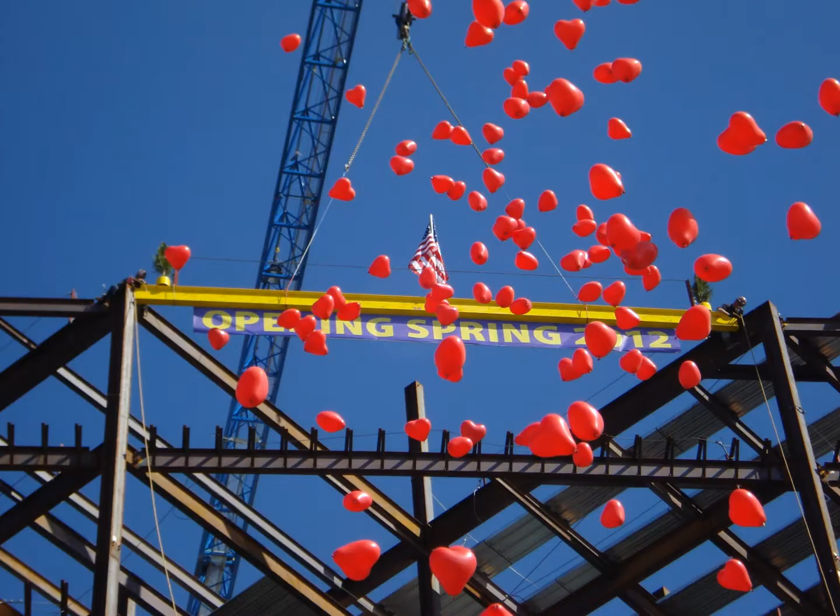During your safety orientation, you will hear and receive a lot of general information about work rules and the safe work practices required while working on this project. Please be advised that there is a required quiz at the end of this orientation. This information is vital to your health and safety and to the health and safety of those around you.

Our culture is based on the philosophy that all injuries are preventable and that performing work safely at every project, every day, is key to our long-term success as an organization.

We have a simple goal. We want you to go home every day feeling as fit and as healthy as you did when you came to work, free from injury and illness. Your loved ones are counting on this too, and we don't want to disappoint them, ever.

Our vision for safety excellence: to provide a safe and healthy work environment for all who are touched by our business, and a culture of safety commitment to each other.

A personal look at safety. Which one are you? If you ask 100 people what safety is, you will likely get at least that many answers. The goal for us is to bring everyone to the point of making a personal choice to work safe, because no one comes to work thinking, I'm going to get hurt today.

We don't want you to be safe because you'll get into trouble if you're not. We want you to be safe because it's the right thing to do.

Purpose of orientation. The purpose of this orientation is: number 1, to set and communicate goals. Number 2, to share the expectations for working on site. Number 3, to share your responsibilities on site. Number 4, to discuss the project culture of safety. Number 5, to review common construction safety hazards and appropriate controls. Number 6, to help with any questions you might have.

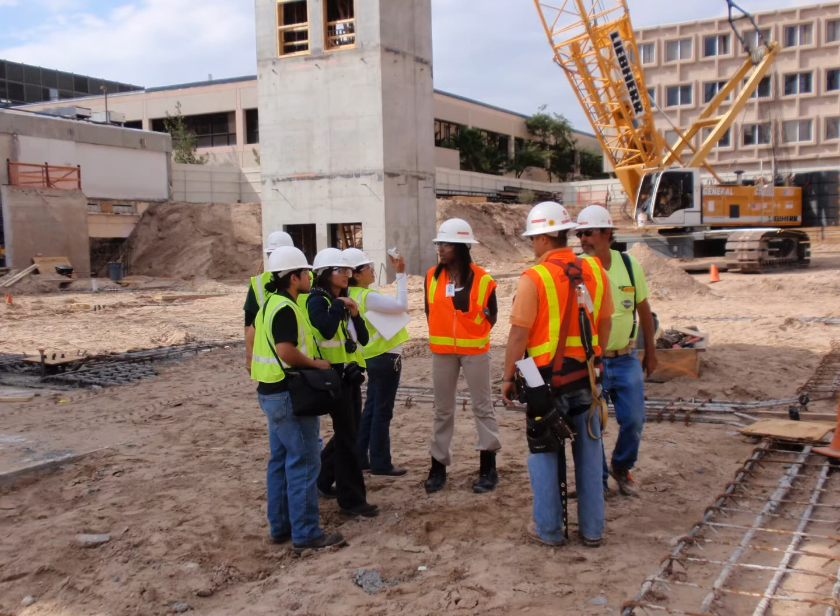Harassment policy statement. We are committed to maintaining a work environment that is free of harassment. In keeping with this commitment, we will not tolerate harassment of company employees by anyone, including any supervisor or coworker, and to the extent possible by any vendor, client, or customer of the company.

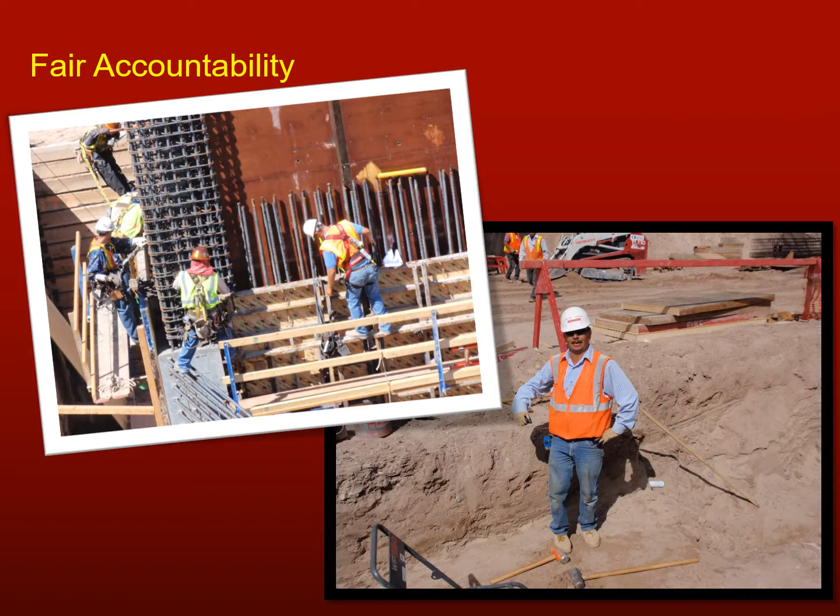Fair accountability. Fair accountability ensures accountability is balanced, people make mistakes. It involves a consistent, impartial approach, transparent and fair analysis, and believes few people are malicious. It encourages coaching and honesty. Traditional disciplinary principles are still used for reckless behavior; reckless conduct is dealt with using zero tolerance, and some actions justify dismissal.

Tobacco-free campus policy. Our facility and construction site is tobacco-free. Smoking is only permitted in designated areas. The use of any tobacco product is prohibited by any employee, including faculty and staff, patient, student, volunteer, contractor, or visitor in all buildings, grounds, and spaces either leased or owned.

Working inside a hospital. Working in a hospital is different than working in traditional commercial buildings. Patient safety and care is of the utmost importance. Always give patients and providers the right of way.

If you have work to perform inside the existing facility, there are several things you should know. Prior to working inside the existing structure, your company will schedule you for specific training. This training will include all hospital safety guidelines as well as infection control. Owner facilities are accessible only for performance of necessary work.

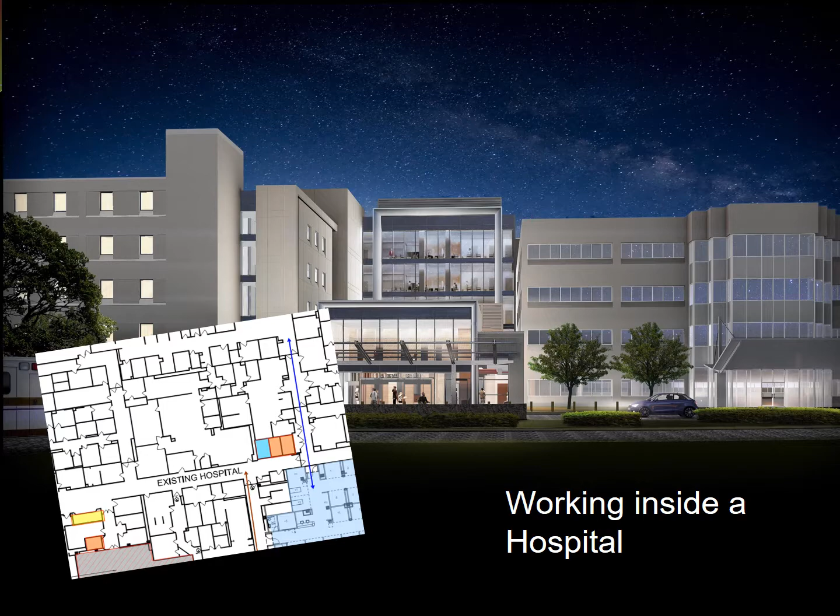Badge access. Many facilities require badge access for construction employees. Please get with your supervisor to complete required paperwork for badge access. Access to the project will be strictly controlled to ensure only those with required training are allowed on site.

Personal awareness. We want you to know what's going on around you during the day. The job site is constantly changing, so every 20 minutes, look 20 feet around your work area for 20 seconds.

Personal protective equipment, also known as PPE. Minimum requirements: hard hat worn properly, eye protection, leather or equivalent work boots, a minimum 4-inch sleeved t-shirt, work pants, and hand protection. Your company's rules dictate if they are more stringent.

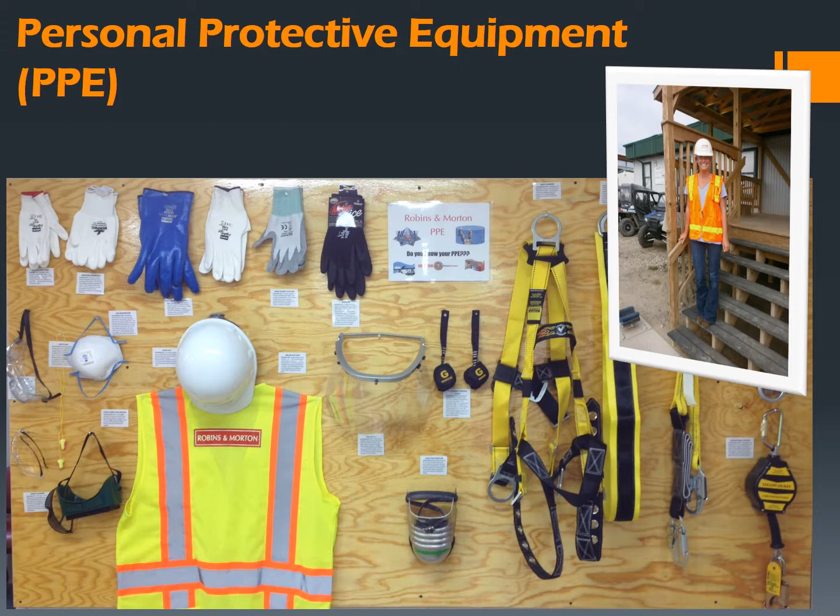Other PPE may be needed, such as fall protection at or above 6 feet, hearing protection greater than 85 decibels, respiratory protection for dust, odors, and chemicals, additional eye protection, face shield, welding hood, and reflective or protective vest.

Head protection is required throughout the project for everyone. Hazards that cause the requirement for head protection are falling objects, overhead work, impact as a result of bumping or striking, electrical, flying or swinging debris or objects.

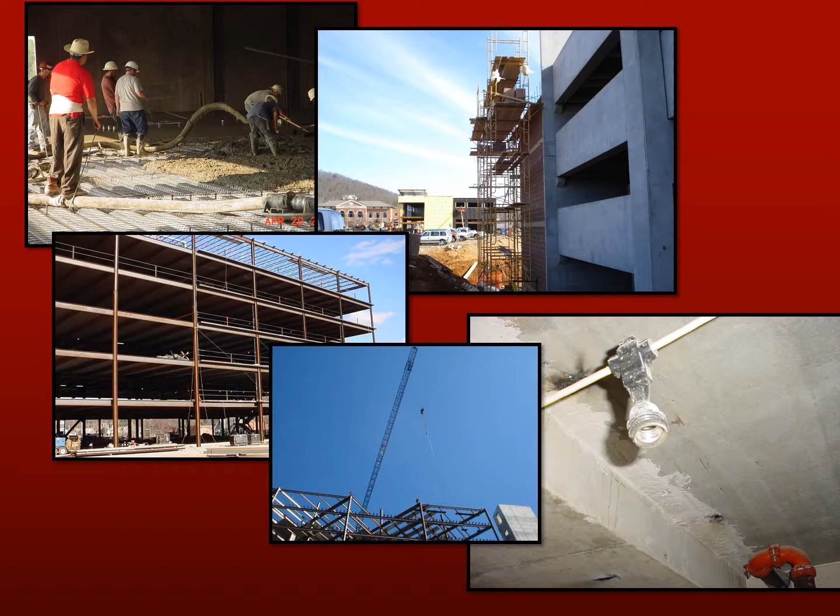Head protection should be inspected daily for signs of damage and removed from service if found.

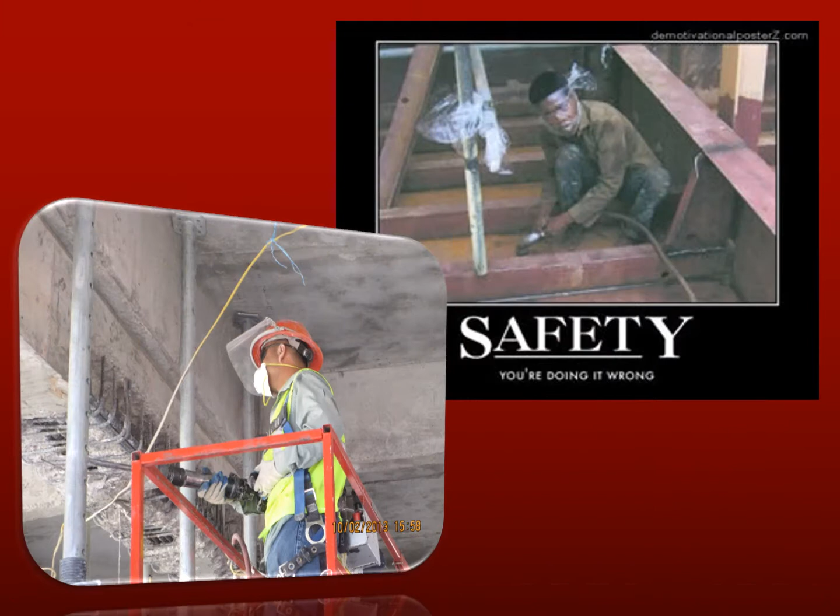Hazards requiring eye and face protection are grinding, sawing, using power tools, high wind areas, mixing materials, splash hazards, cutting, drilling, overhead demo, wrecking and stripping forms.

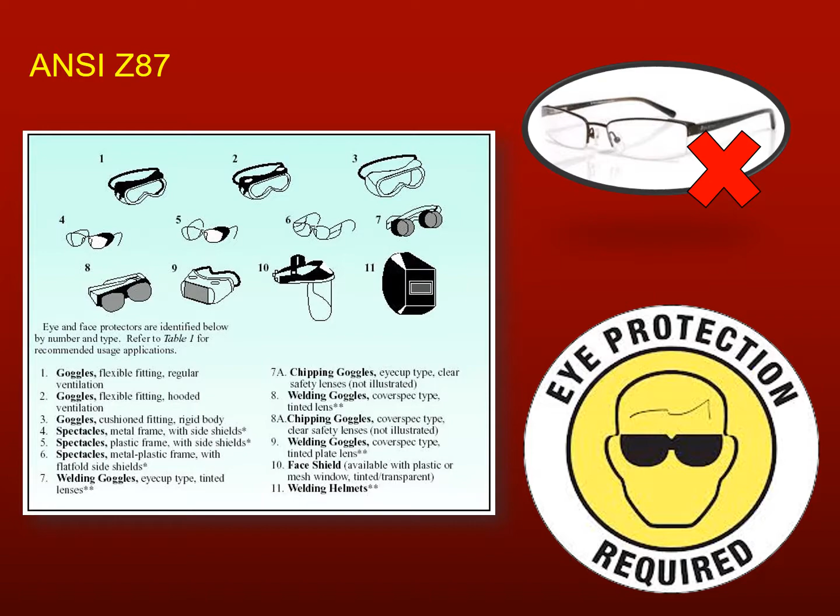Ordinary prescription glasses do not provide the required protection. Proper choices include rated glasses with side shields, rated over glasses, and rated goggles with corrective lenses.

Face shields are used with safety glasses. Face shields must be worn where there is exposure to the face.

Hand and arm placement and protection. Hand and arm protection is always the last resort. Avoid putting your arms, hands, and fingers near or in the line of fire. As a last resort, we assign, train, and use adequate PPE.

Proper hand placement keys: discuss all pinch point, moving part, potential crush, and caught-between hazards. Discuss other potential areas of concern or possible hand, arm, or finger hazards. Always know where your body parts are while working, and always be sure guards are in place where required.

Hearing protection. When it is not possible to reduce the noise or duration of the noise, hearing protection must be provided and it has to be adequate for the exposure.

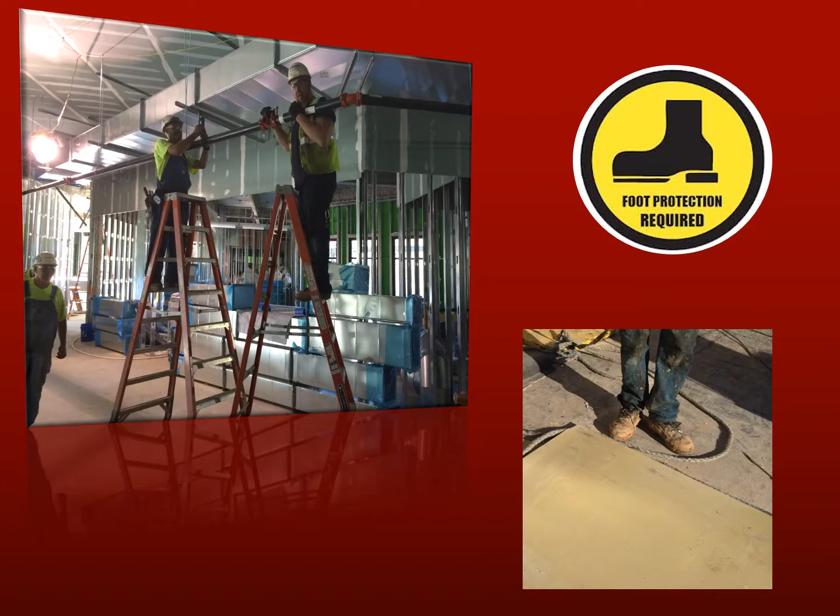Leather or equivalent work boots are required for all workers on this project. We are exposed to hazards when using jumping jack tamps, using remote controlled rollers, and working as a rigger.

Fall prevention and protection. We will comply with the Occupational Safety and Health Administration standards, also known as OSHA, for construction as it relates to fall protection. Exceptions will not be permitted on this project.

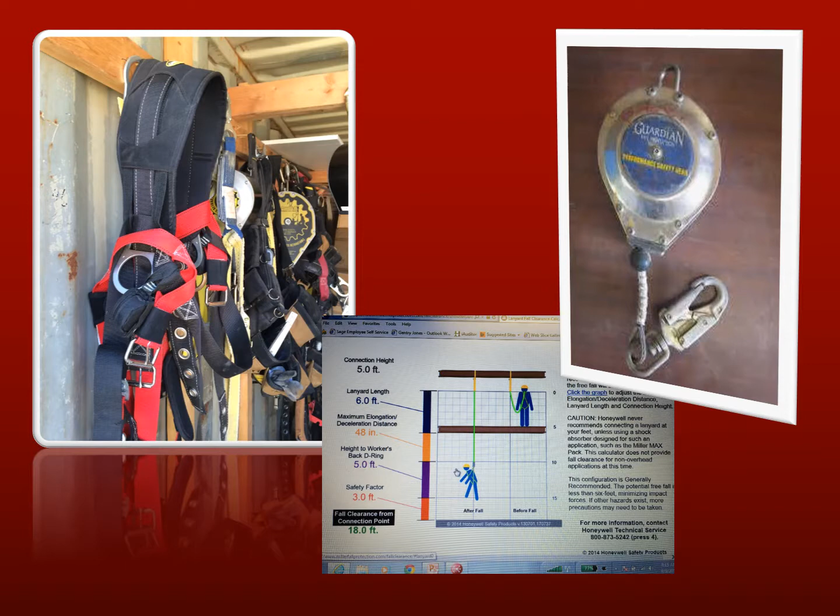Any employee exposed to a fall of 6 feet or more must be protected from falls by guardrails, safety nets, or by means of personal fall protection systems. Anchor points must be rated for 5,000 pounds.

Consider potential fall distances. 100% tie-off will be used anytime installed fall protection is removed or disabled.

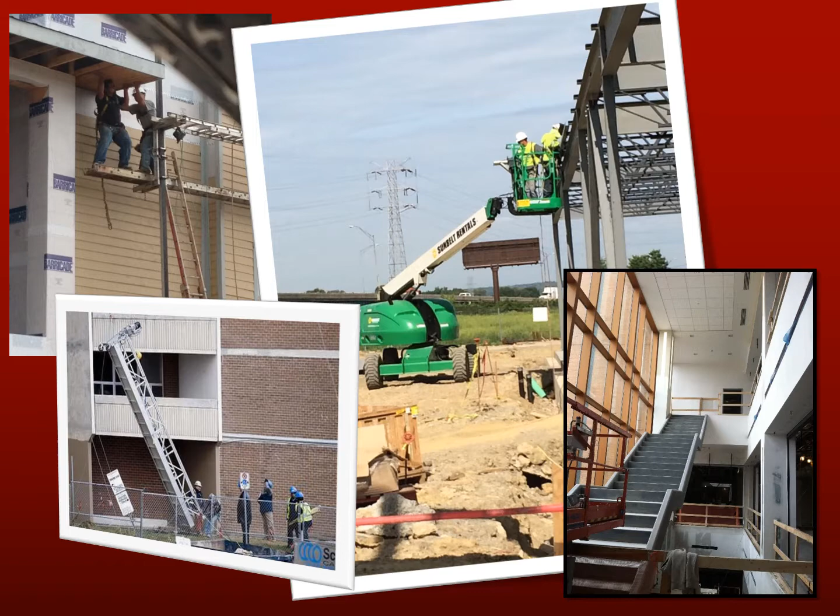Examples of work possibly requiring fall protection are suspended scaffolds, elevated form work, material hoist, flat roof, leading edge work, open-sided floors, working above dangerous equipment, unprotected floor holes, steel erection, precast erection, and overhand bricklaying.

Watch for fall hazards. Look for loose and missing guardrails. When you find them, share the risk and tell someone who can have it corrected.

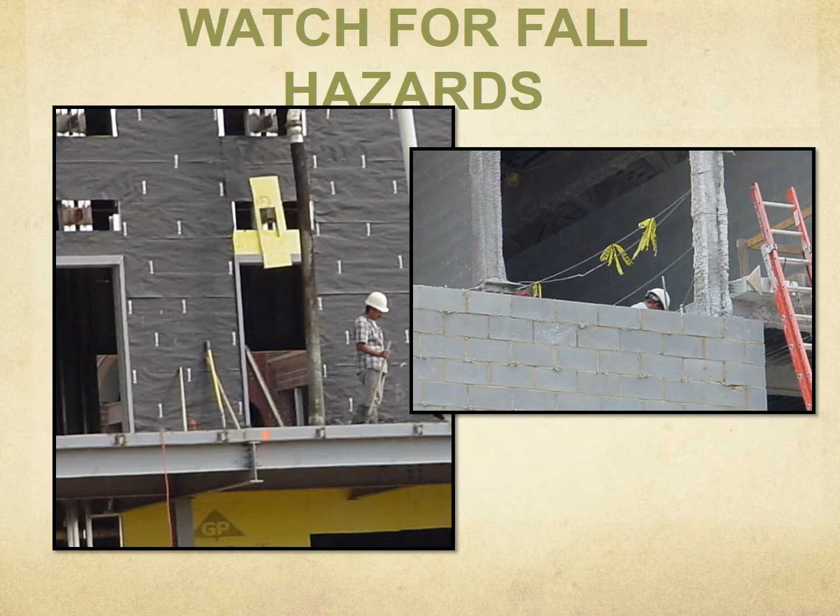It's as easy as A, B, C: Anchor, body harness, connection.

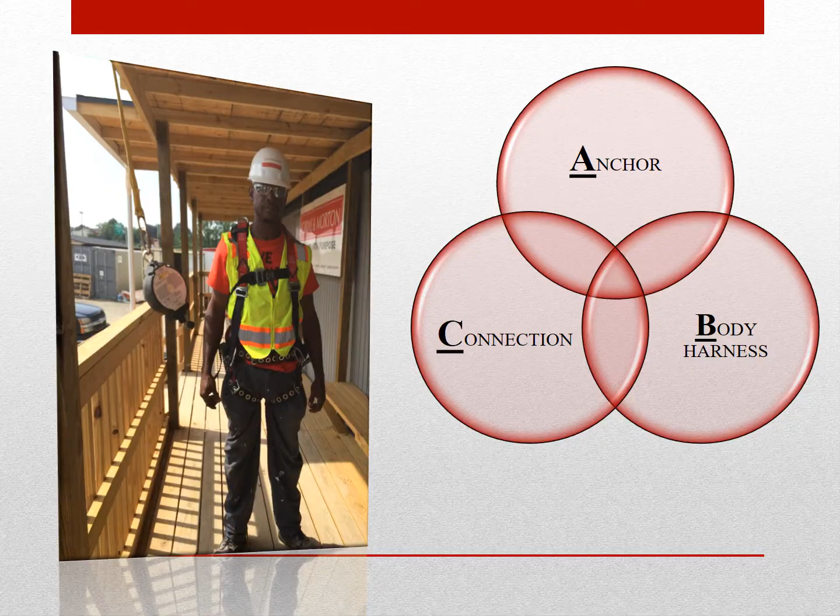Fall protection may consist of guardrail systems, safety net systems, personal fall arrest systems, or warning line systems within this program unless otherwise noted. All fall protection must be positive in nature, meaning there must be physical means to prevent an individual or individuals from falling.

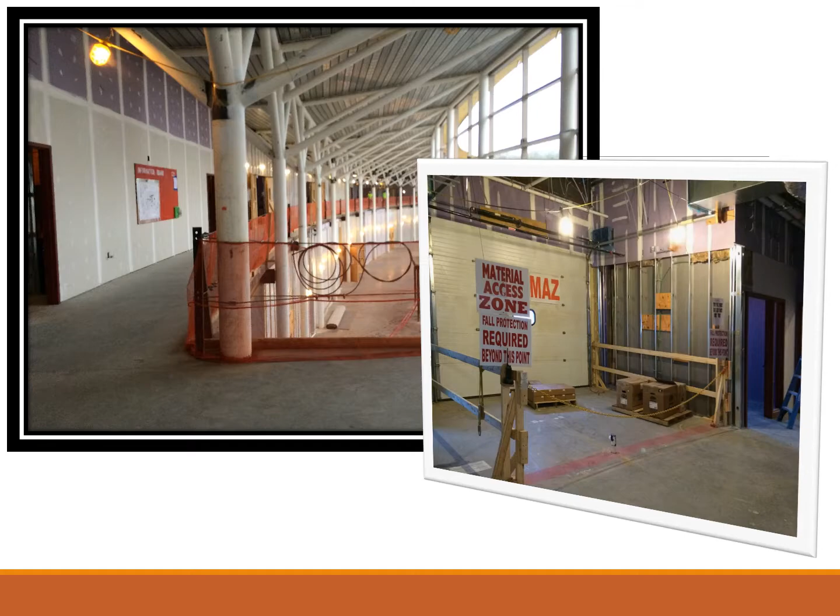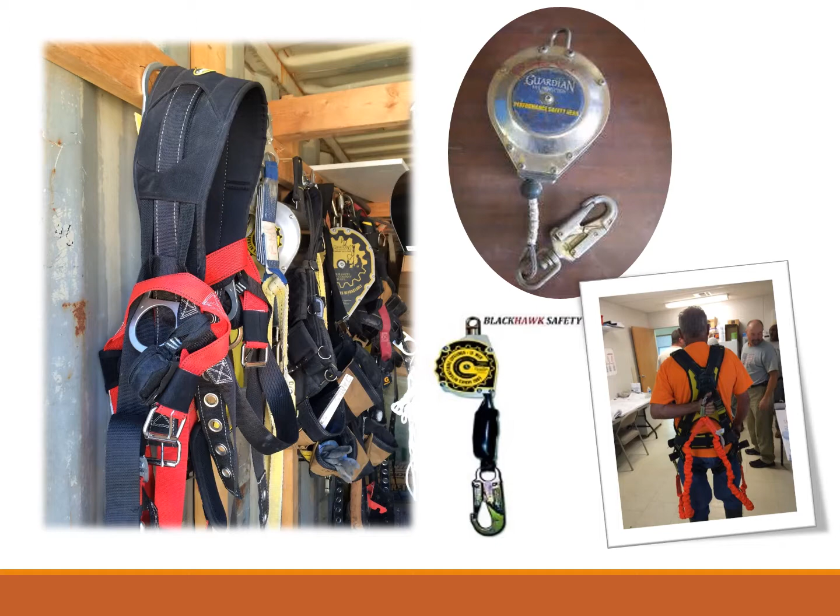There is a presumption that providing a conventional fall protection system for employees is feasible and will not create a greater hazard, largely attributable to the advances and prevalence of specialized fall protection equipment on the market today.

Personal anchorage must be independent of any anchorage being used to support or suspend platforms, and must be capable of supporting 5,000 pounds. Consider impacting structures below and total fall distance.

Your competent person should evaluate your work and choose the correct fall protection system to protect you from falls. Fall protection should be designed to: one, keep you from falling more than 6 feet; and two, keep you from falling onto anything that might cause injury or harm.

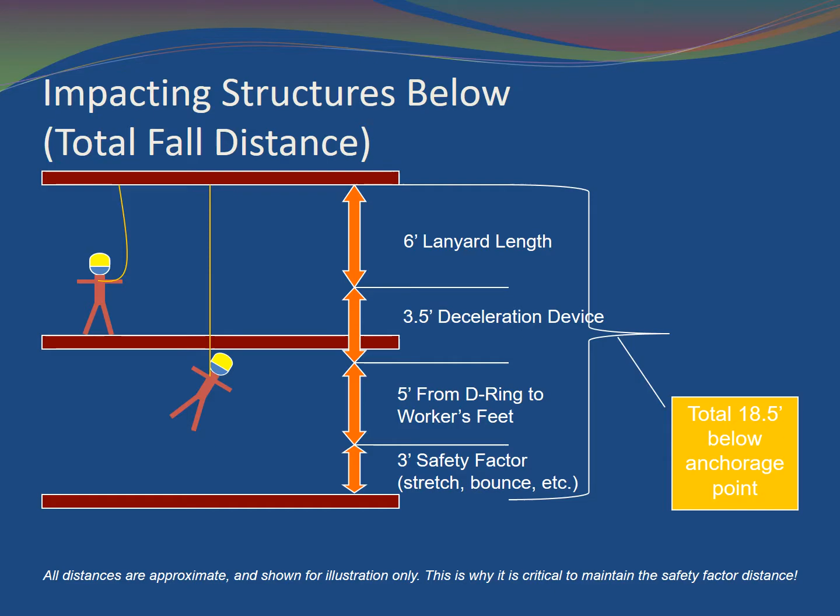Fall protection in boom lifts. All operators must be properly trained. All workers on boom lifts must be secured using a device adequate to arrest a fall or restrain the worker. Your competent person should choose your equipment.

In addition to typical requirements, the Robins & Morton Construction Management Team has best practices that will be used on site.

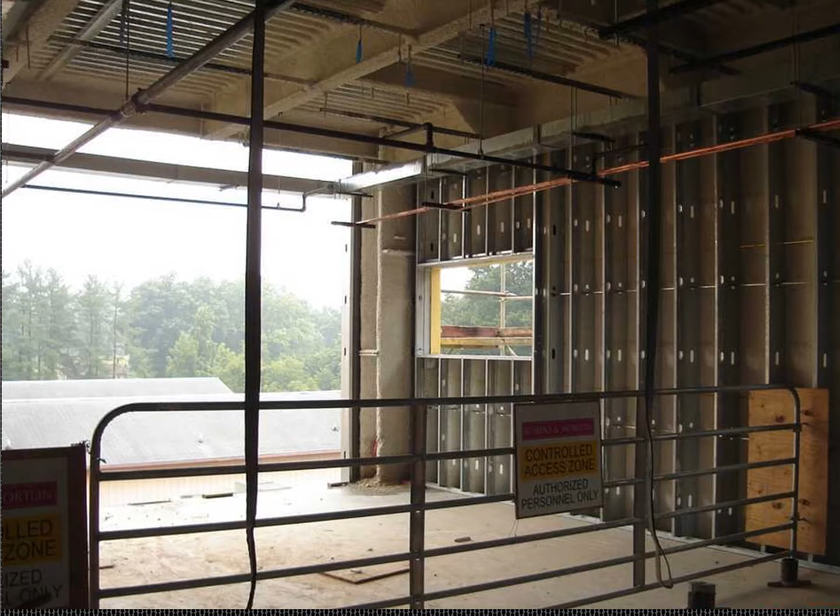There should always be an approved barrier between you and any fall hazards. If employees are required to go beyond warning lines, they must be tied off 100% of the time. Warning lines: roofers, 6 feet from the edge. Everyone else, 15 feet from the edge.

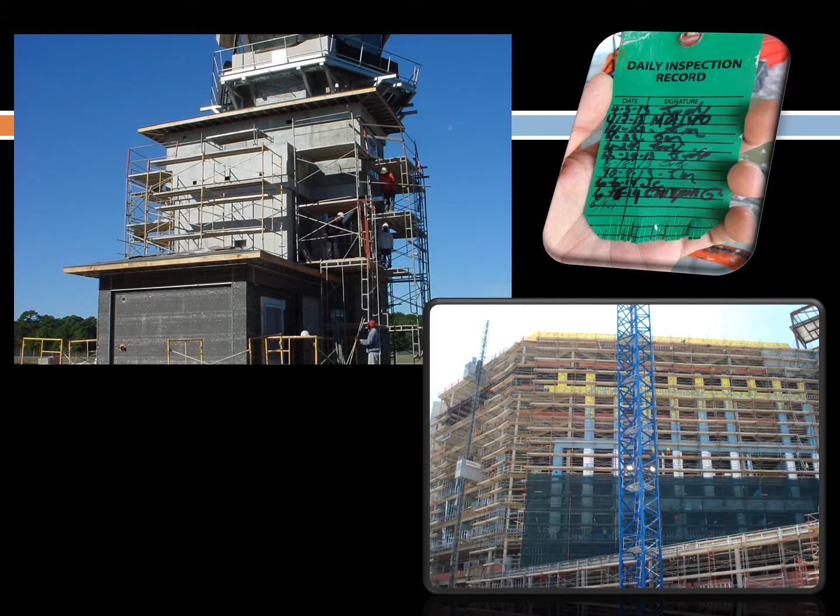Scaffolding: all scaffolds must be designed, erected, and disassembled under the supervision of a competent person. All scaffolds shall be inspected by the competent person daily, prior to use, and after any changes. Scaffold platforms will be completely decked at all working levels. Ladder access will be provided.

Rolling scaffold height shall not be more than 4 times the scaffold's width, or by manufacturer's recommendations. If so, anchor or utilize outriggers. Never ride a rolling scaffold.

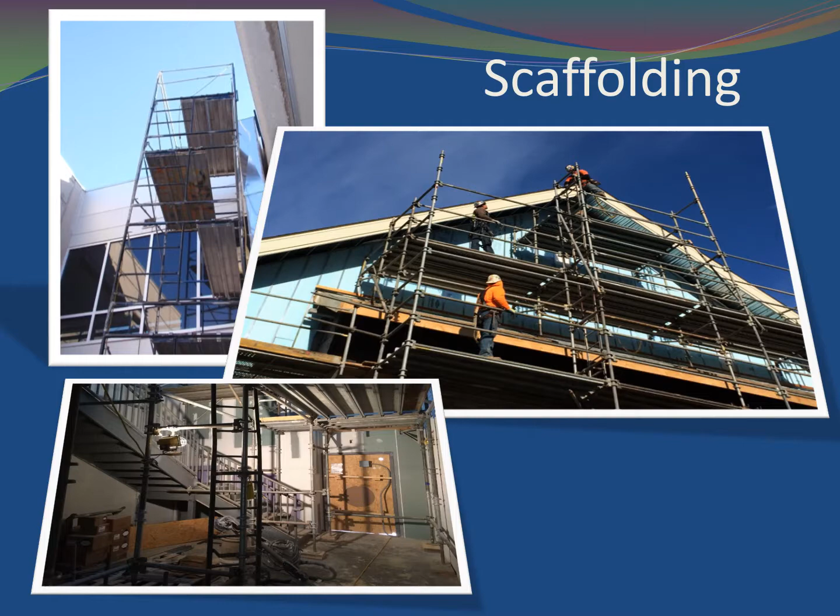Excavations and trenching: all trenches and excavations shall be inspected daily, prior to use, and after any potential changes, i.e. weather, equipment, etc. No employees shall enter a trench or excavation without the competent person's approval. Trenches or excavations greater than 4 feet deep require a method of access or egress. Trenches shall have sufficient ladders to ensure all travel distances to a ladder are less than 25 feet.

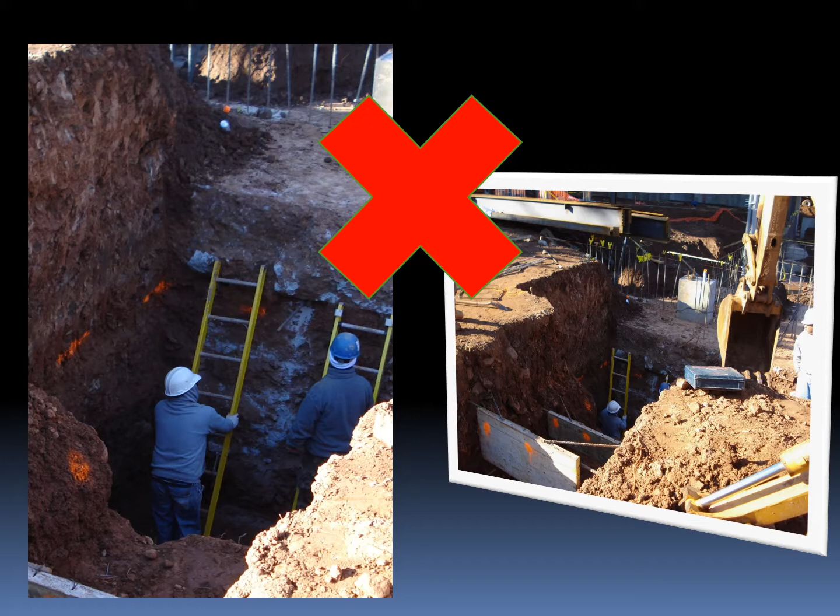All trenches and excavations 5 feet deep or more require sloping, shoring, or shielding. If soil is not visually and manually classified, it must be treated as type C soil. All spoils shall be kept 2 feet back from the edge of the excavation or trench.

Cave-in hazard. This excavation has inadequate support posts and egress access. Always follow the manufacturer rules for any protective system.

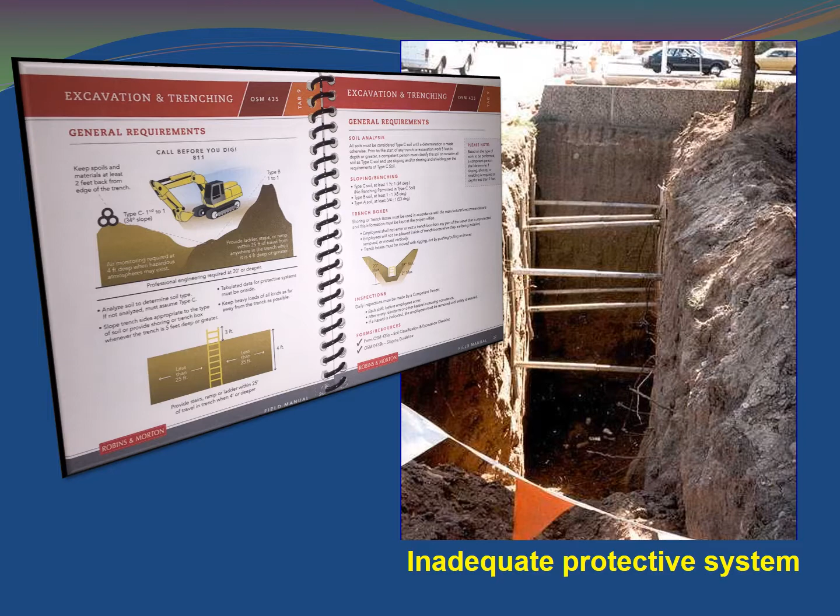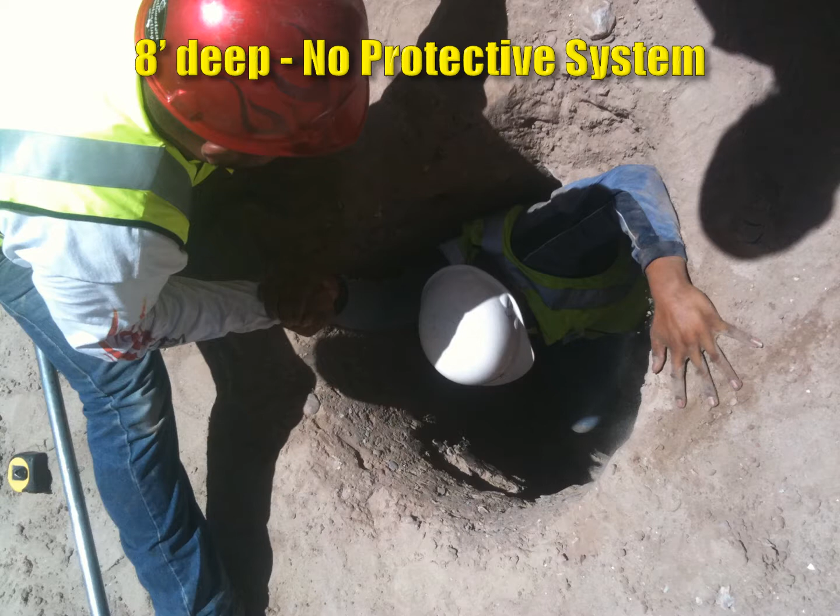8 feet deep, no protective system. This worker went into the hole to clean out spalling materials. Basically, the hole was caving in.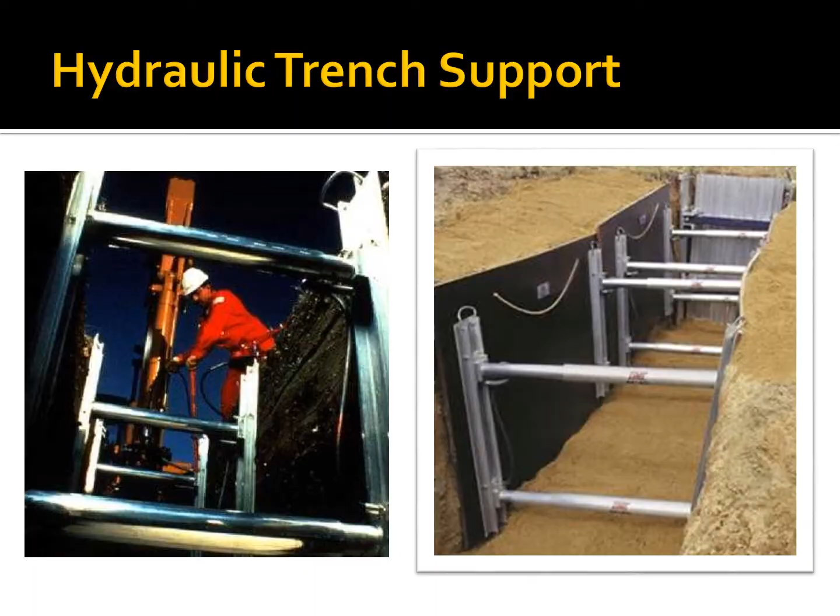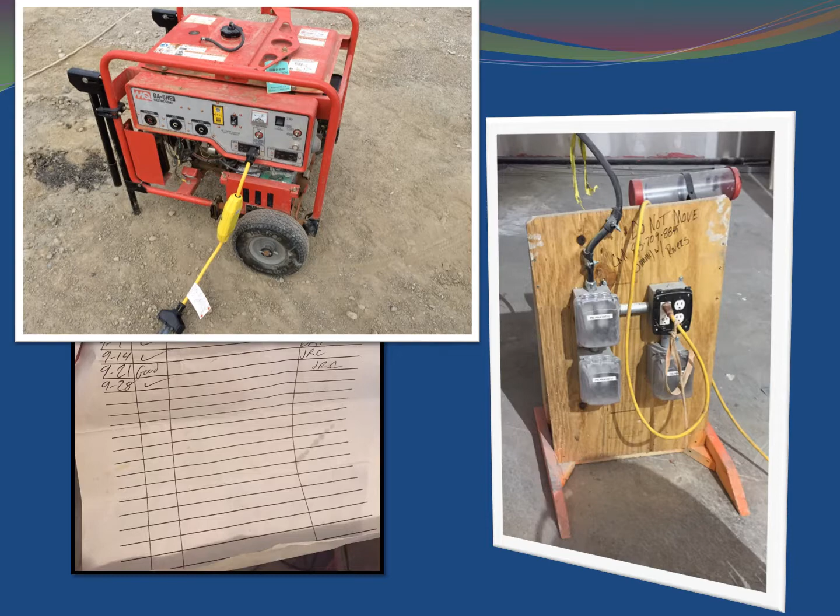Electrical safety. Only the site electrical contractor will perform work on electrical lines, circuits, or equipment. Extension and tool cords must be inspected prior to each use. All temporary power outlets will be equipped with GFCIs.

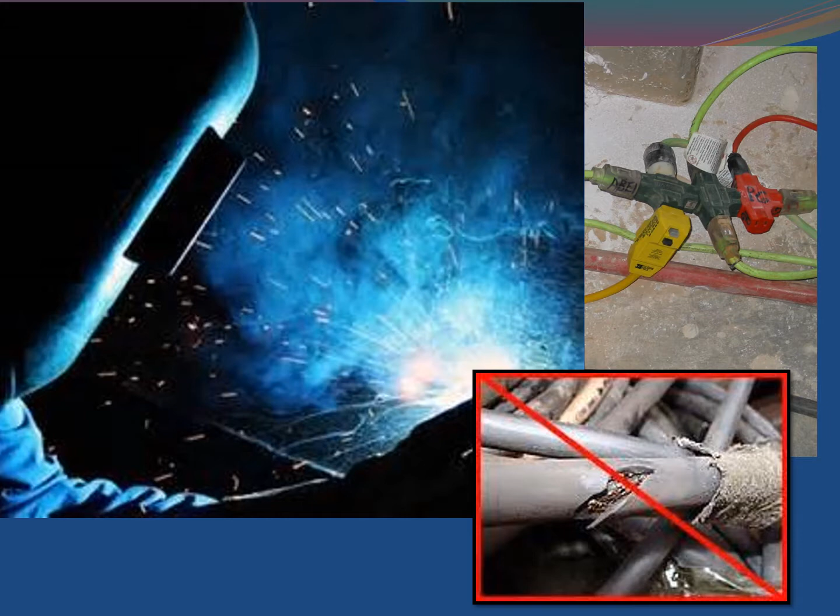When plugging into permanent power, a GFCI adapter must be used and shall be provided by the subcontractor. Welding leads and cords will be hung using insulated wire or equivalent. Keep welding leads off guardrails and stair rails. No exposed conductors.

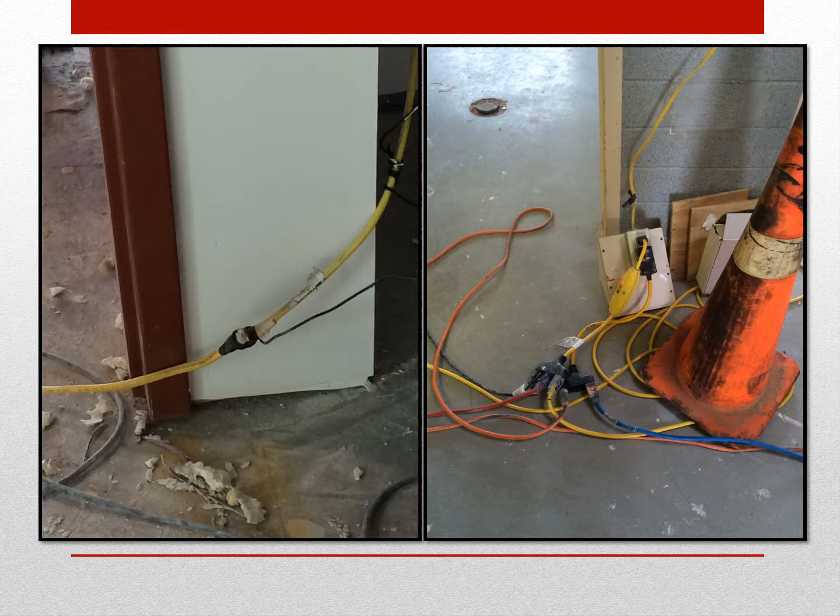Electrical cord management: keep exits clear of cords. Ideas: run cords overhead, run cords around perimeter, tape cords down or use cord covers. Use cones for short duration use of extension cord, 5 minutes or less.

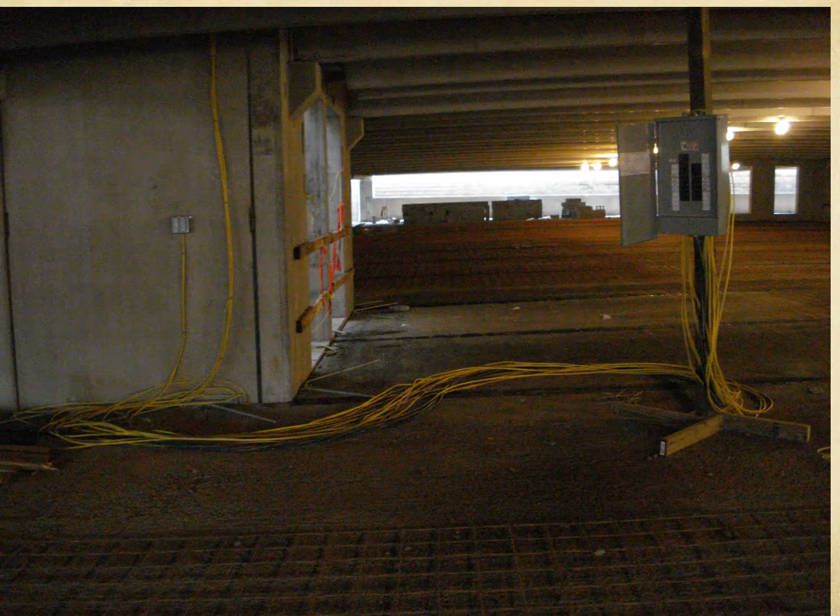All cords must be stored and put away after use. Temporary wiring must be installed to facilitate proper cord management. Never run a cord through water.

All ladders must be OSHA approved and meet construction standards, Type 1 or Type 1A. All ladders must be used in accordance with manufacturer's guidelines. Step ladders, also known as A-frame ladders, must be fully open and locked. Do not use the top cap or top step of the ladder.

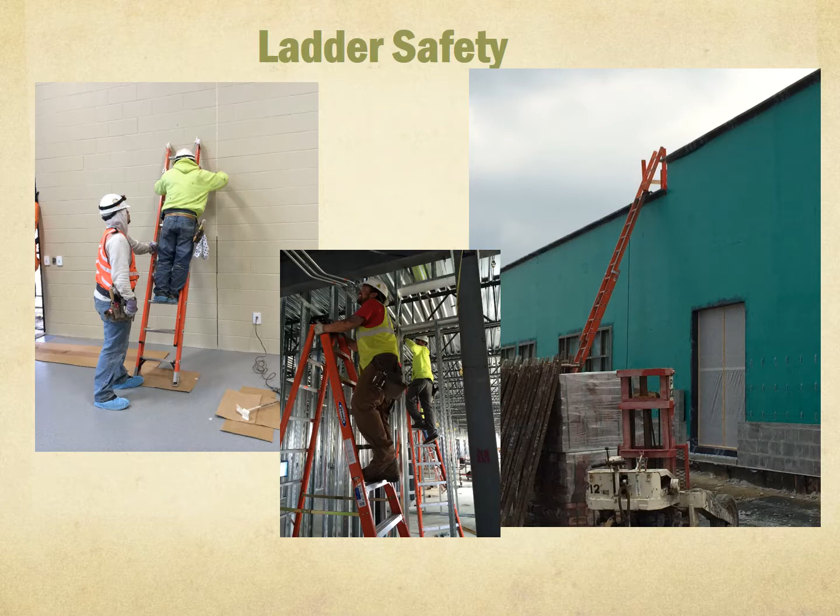Extension ladders may not be separated. Ladders must extend 36 inches above the landing point. Aluminum or metal ladders of any type are not allowed on site.

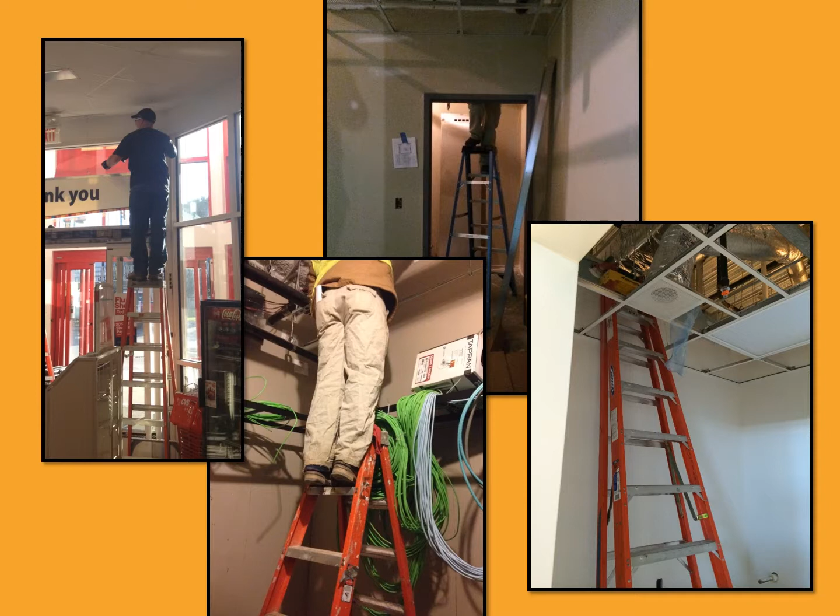Ladders should be clearly marked with the company name. Ladders must be inspected prior to each use. Damaged ladders must not be used. All ladder users must be properly trained. Ladder types will be determined by your competent person.

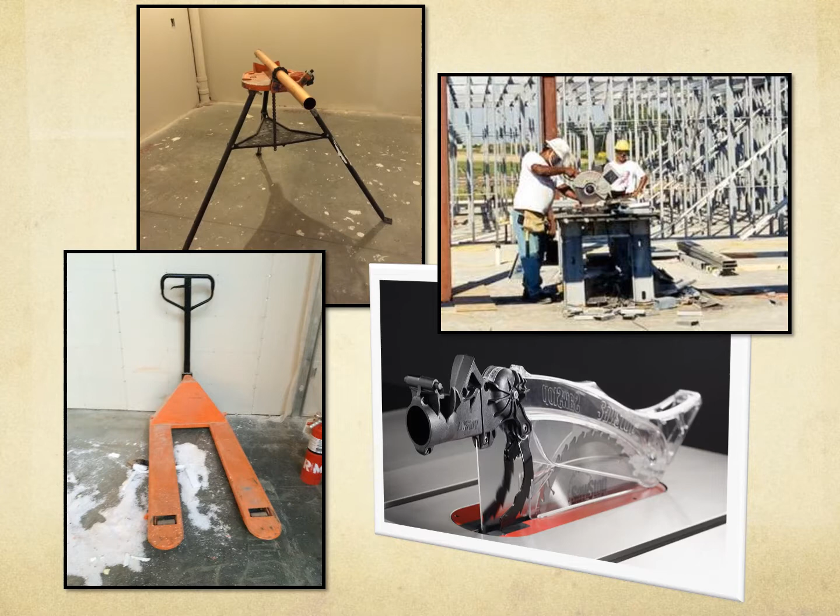Basic tool safety rules: maintain tools, use the right tool for the job, inspect before use, operate according to manufacturer's instructions, use PPE, use guards.

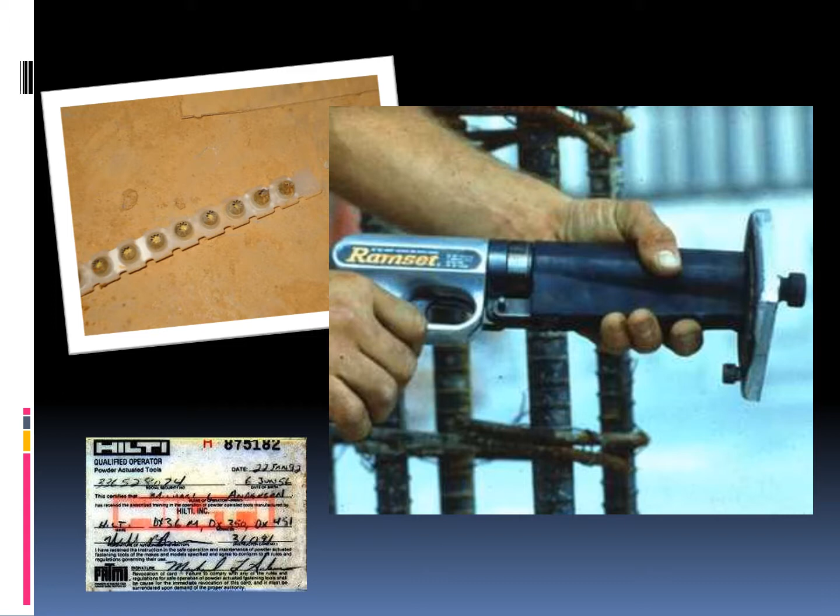Power actuated tools. The user must be trained and licensed to operate. Test the tool each day before loading to ensure these safety devices are working properly. Wear suitable ear, eye, and face protection. Select a powder level that will do the work without excessive force.

Lockout, tagout. Definitions: hazardous energy - any form of energy, electrical, pneumatic, thermal, hydraulic, gaseous, or gravity, that could potentially cause, through its release, personal injury or property damage. Work on electrical components that require lockout, tagout will be evaluated on a case-by-case basis. MC Dean will be the only ones allowed to work on live, energized equipment.

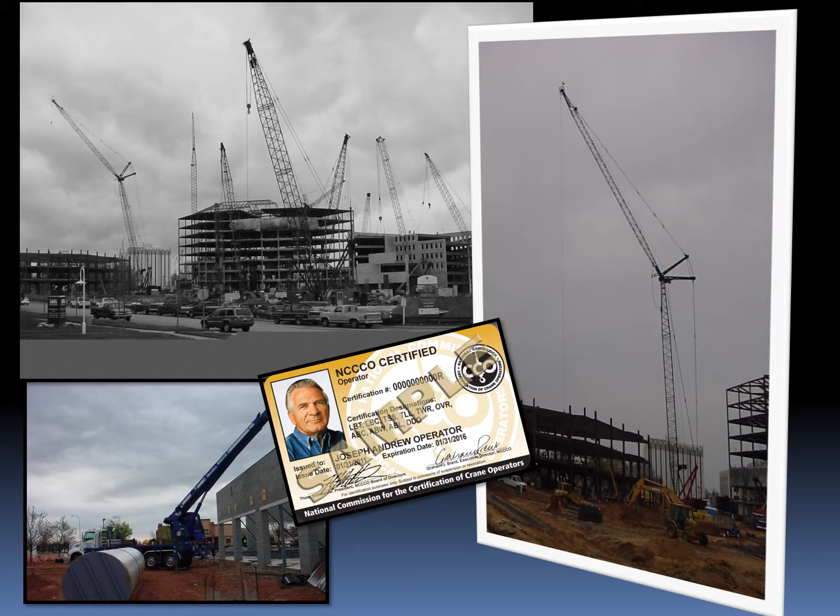Crane safety. Only NCCCO certified crane operators may operate any cranes on this site. A valid annual crane inspection report shall be provided to R&M prior to any crane operations. Crane operators maintain full control over hoisting and must obey all operator manual requirements, including wind. A documented daily crane inspection must be performed and kept in the crane at all times.

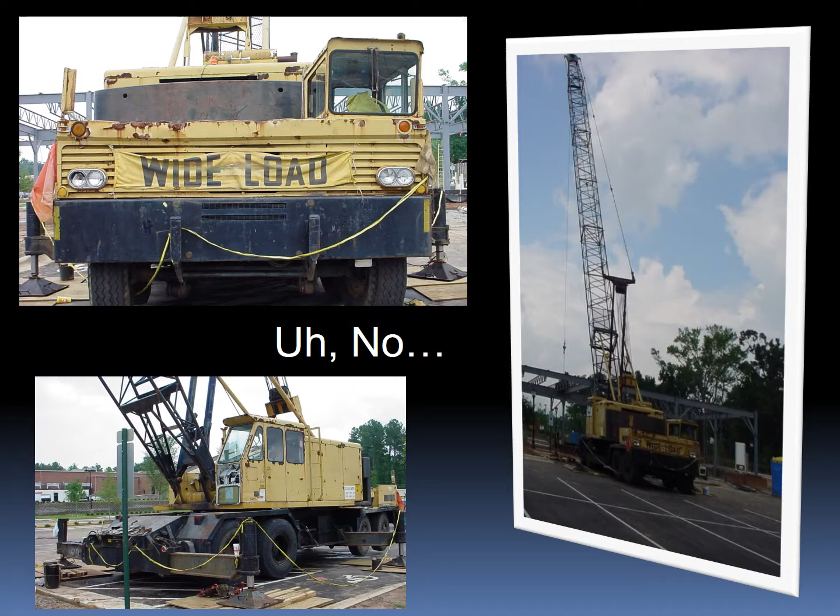Crane use: cranes will not be brought on site without prior notification and approval. We have very specific requirements for crane documentation. This process can take from days to weeks to accomplish.

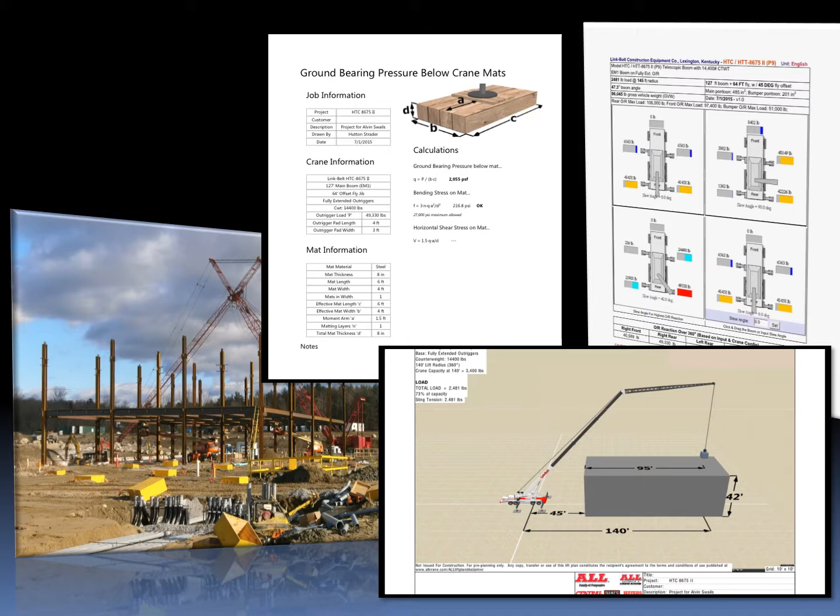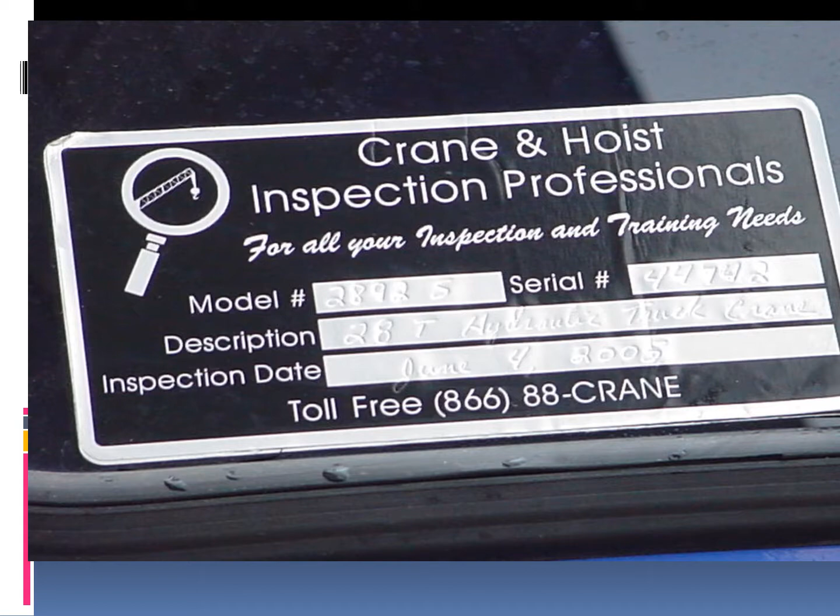Crane inspections. The crane inspection is not a sticker on the window. It is a written pass or fail document that lists the items inspected, any discrepancies, corrections, dates corrected, done by a third party only.

Crane safety. Operator's manual must be in the rig at all times. Only qualified riggers shall rig loads. All rigging equipment shall be inspected daily and prior to any lift. Loads shall not be lifted over personnel. Crane operators and signalmen shall utilize horns or whistles to warn site personnel of impending lift. 100% use of taglines unless greater hazard. Safety latches are required on all hooks.

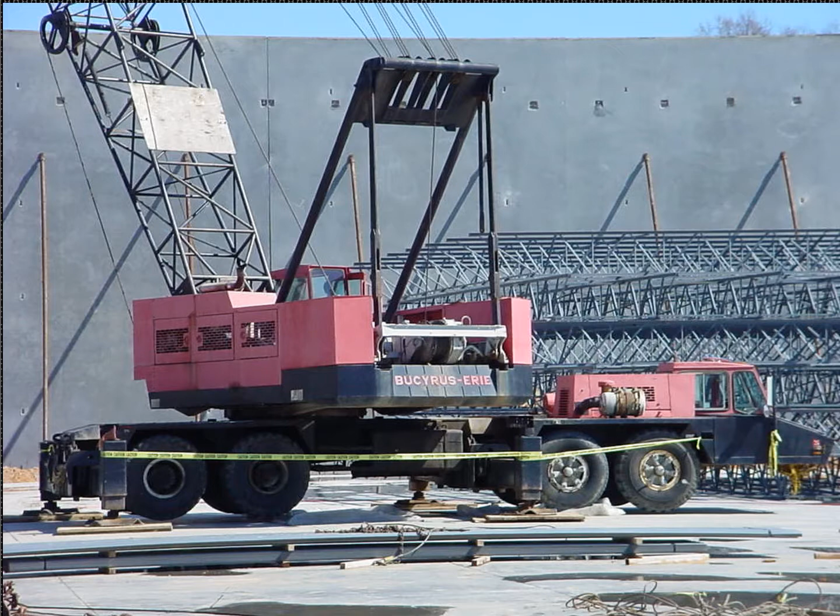Swinging radius. Stay out of the swing radius of the crane. Make sure there are barrier guards showing the swing radius.

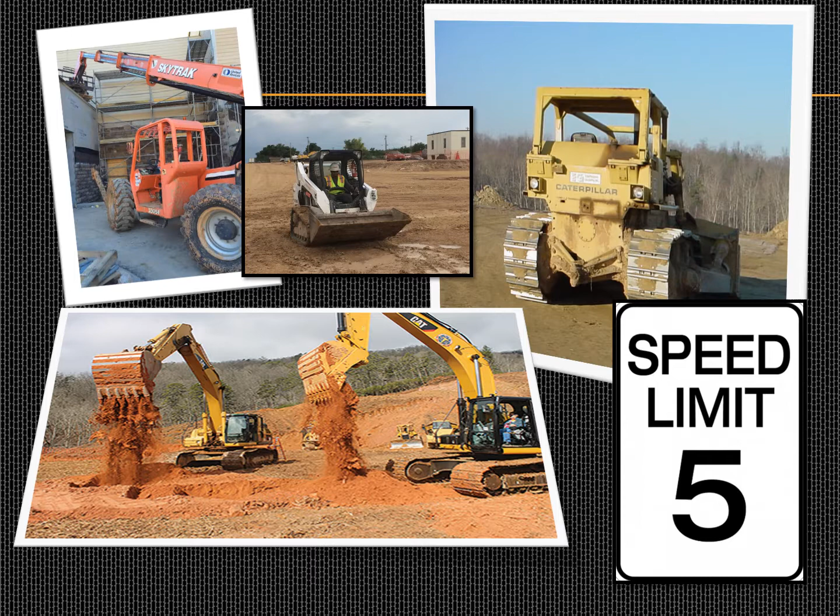Equipment and vehicle use. Only trained or authorized employees may operate vehicles or equipment. Use of seat belts is required. Mobile equipment that has a restricted rear view must have a working backup alarm and/or a spotter. Never back up without looking. Workers on the ground, always make eye contact with the operator and signal your intention before approaching the equipment. The only way to be sure the operator saw you is if you see them looking at you.

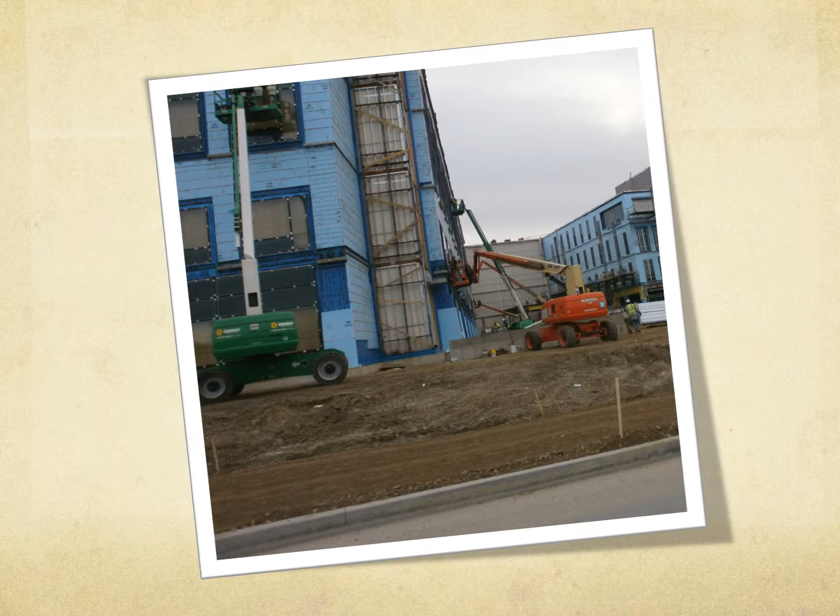Take care around equipment. Watch for equipment. Know what's above you when you come out of the building.

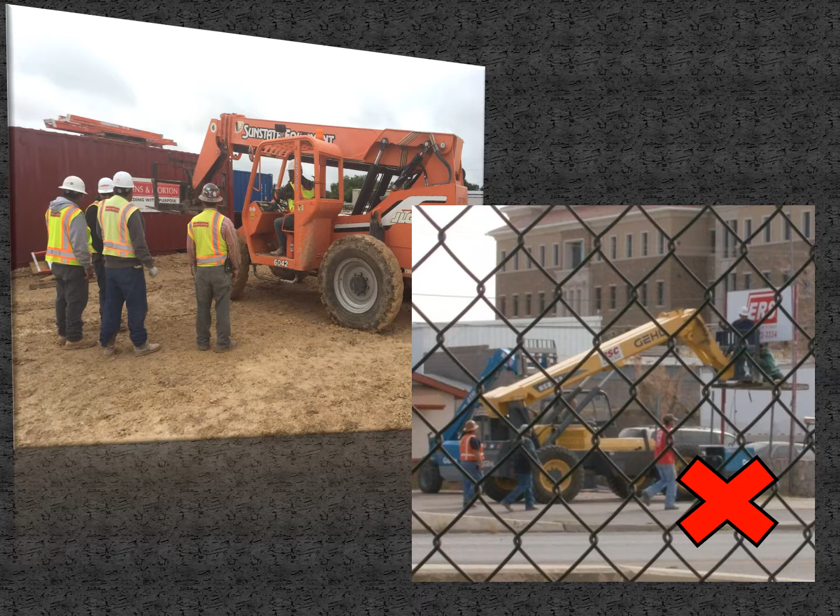Operating a forklift safely. No one is permitted to operate a forklift unless they have received forklift training and have been evaluated using the lift. Training is only good for 3 years.

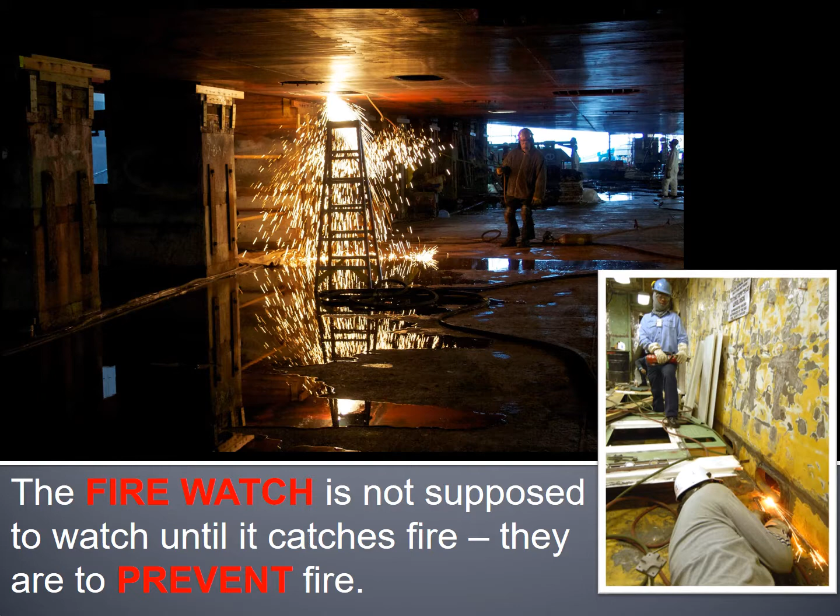Hot work/fire prevention. Hot work definition: any activity that produces excessive heat, exposed heater coils, open flame, or sparks. Requirements. Number 1: the area around and below the hot work must be cleared of all flammables and combustibles. All items that cannot be removed must be covered with fire blankets. All floor and wall openings must be protected. Number 2: a fully charged, inspected ABC fire extinguisher must be located adjacent to the hot work operation.

Fire protection. Should you need to use a fire extinguisher on the project, remember PASS. Number 1: pull the pin from the fire extinguisher. Number 2: aim the hose of the extinguisher at the base of the fire. Number 3: squeeze the trigger of the fire extinguisher. Number 4: sweep extinguishing media back and forth at the base of the fire.

Report all extinguisher use to your supervisor. You should provide your own task-specific fire extinguisher. The building's fire extinguishers are for the building.

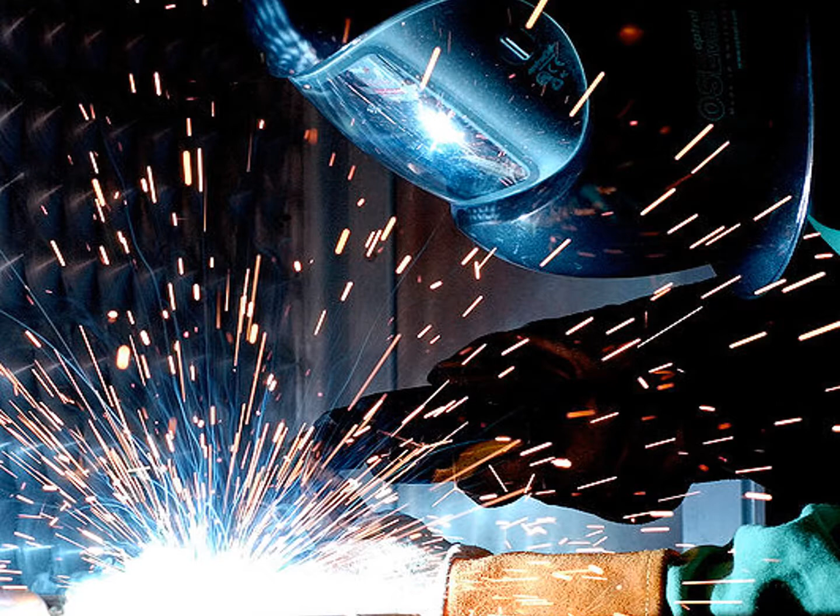Welding safety. Welding arcs contain ultraviolet light, which may cause eye damage. The spectrum of the welding arc is similar to that of the sun. Welding arcs can be in excess of 3,100 degrees. Do not watch these operations.

Hazard communication, your right to know. Safety data sheets, also known as SDS. All hazardous materials on site shall have an SDS on file at the site. SDS logs will be maintained by all contractors. SDS locations shall be made known and available to all employees and at centralized locations. The appropriate MSDS should be reviewed prior to the handling of new hazardous materials.

Container labeling. All hazardous materials, including flammable and combustible materials, must be properly labeled and stored in an appropriate container or a locker. All containers used to store any material must be appropriately labeled.

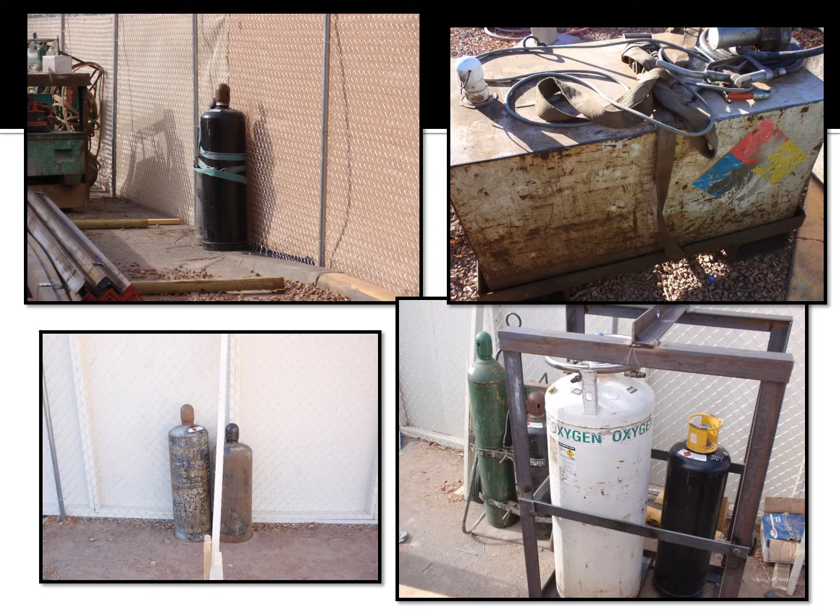Chemical storage. All chemicals and equipment containing chemicals must be stored in approved areas, i.e., a chemical cabinet or a bunker. Contractors are responsible for removing all unused chemicals from the project site at the completion of their project. Compressed gas cylinders will be secured at all times. All dedicated chemical storage areas for contractors must have safety data sheets available at the storage location.

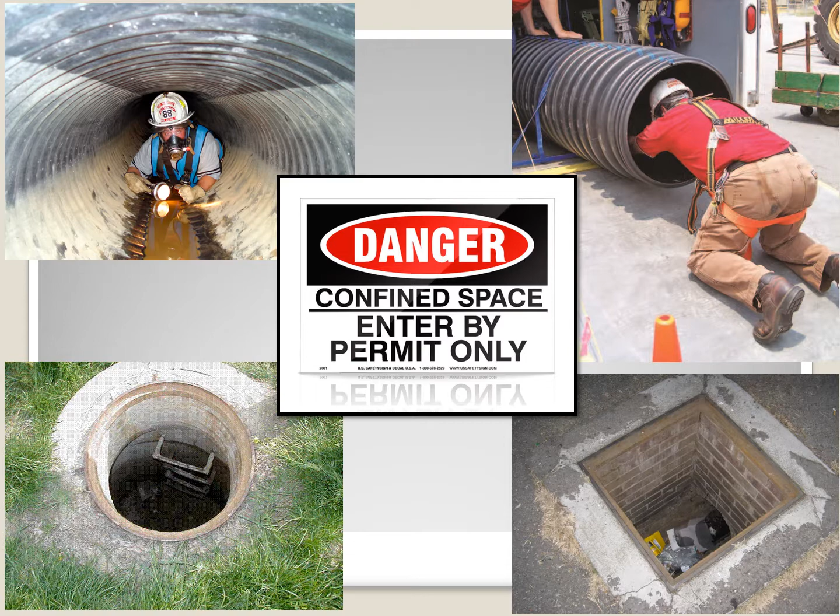Confined space entry. Confined space means a space that 1: is large enough and so configured that an employee can bodily enter it. 2: has limited or restricted means for entry and exit. And 3: is not designed for continuous employee occupancy.

The Robins & Morton Construction Management Team must be notified 24 hours in advance of any confined space entry. Entry into a confined space may require locking and tagging of equipment, process lines, or electrical components. All workers required to enter, attend, or supervise a confined space entry must be trained in accordance with 29 CFR 1926.1200 per project requirement.

Lifting. Plan before you lift. Consider the following: weight, size, shape, path of travel. Bend or flex your knees. Lift with your legs and keep your feet pointed at the load. Avoid twisting. Ask someone for help. Do not attempt to lift beyond your strength. If the load is too heavy or awkward, ask for help. Never lift more than 50 pounds unassisted.

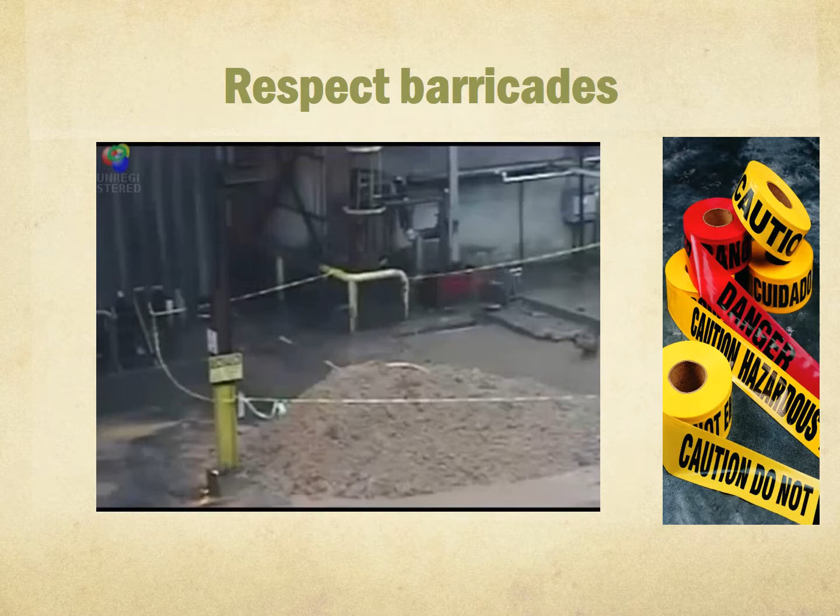Signs and barricades. Employees will read and adhere to all warning signs, decals, and barricades. Red danger barricade tape is used when there is a potentially life-threatening situation and shall not be crossed. Yellow caution barricade tape is used in areas where a non-life-threatening hazard exists. Caution tape may be crossed once an employee has assessed the danger and can enter without injury.

Barricades should only be installed with adequate contact information. Name, company, and phone number is sufficient. Remove barricades as soon as work is completed.

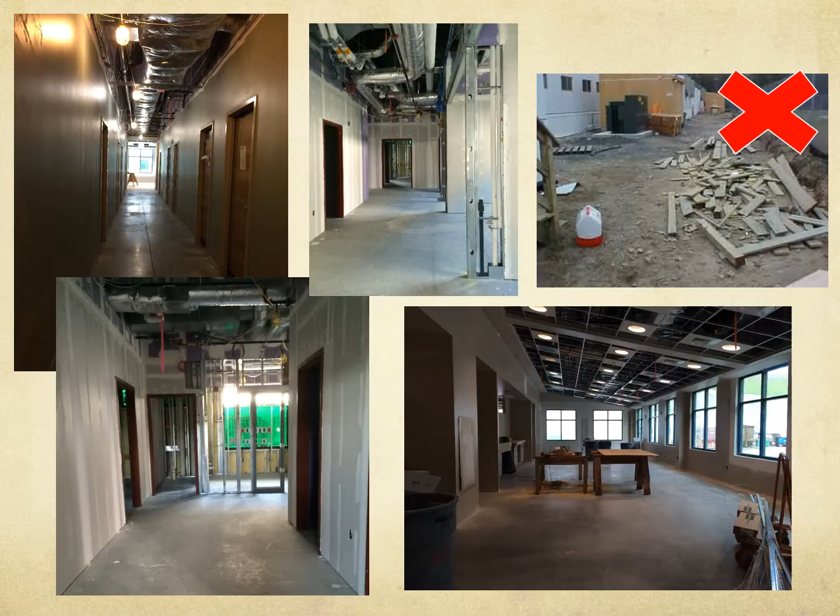Housekeeping. Work areas must be kept clear and free of obstructions by material and debris. Clean as you go practices are required and contractual obligations. Materials will not be stored in a manner that will block, restrict, impede, or prevent access to an egress path or emergency equipment. Stairways shall not be used as storage areas.

Incidents, accidents, or near misses. All accidents and incidents must be reported to your foreman and the Robins and Morton Construction Management Team immediately. This includes near misses, injury or damage caused by construction or non-construction events, injury or damage to the general public, or on-the-job injury but medical attention waived. All accidents involving medical attention will require that the injured party submit a sample for drug and alcohol screening.

Incident reporting, root cause analysis. A root cause analysis will be conducted for incidents by the project team and the causes and corrective measures shared with the project participants. You could be the reason the next injury doesn't happen.

Incident analysis basic attribution error. One of the greatest errors in incident analysis is believing the work happens just as planned. Effective incident analysis follows the work as it actually happened, not the imaginary straight line. The straight line is never where the work happens. Sources of error are usually system-induced, not personal.

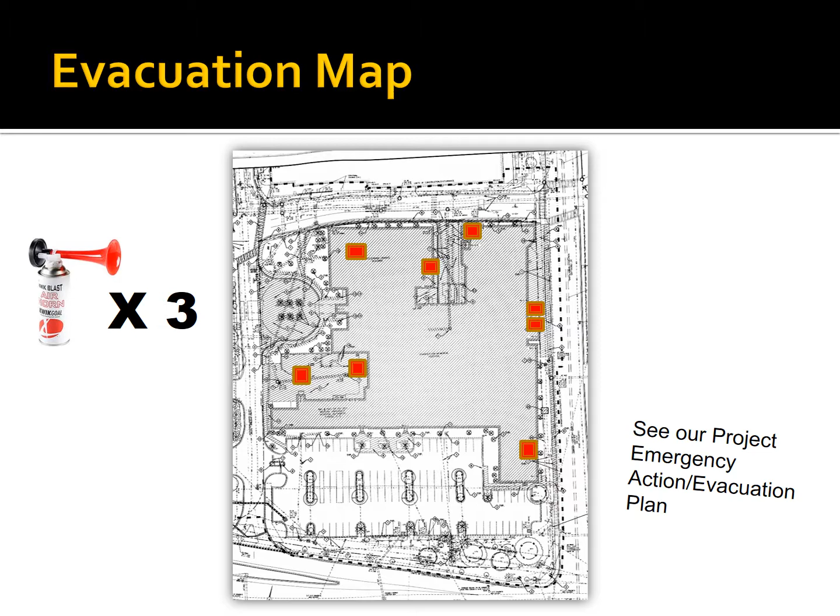On-site medical attention. Each contractor is required to have first aid and CPR trained personnel on site, and should have a local urgent care facility identified for worker treatment in the event of an injury. All injuries will be reported to the site safety manager as soon as possible. Injuries not requiring treatment will still be documented.

Access Care for Robins and Morton employees. Access Care is a first call nursing triage service Robins and Morton has partnered with to provide you with immediate access to a healthcare professional should you become injured while working on our job site. Access Care nurses will work with our employees to provide immediate first aid advice, evaluate the necessity of medical treatment beyond site first aid, and help guide employees through the process of treatment, transitional duty, and return to work in a manner that eliminates the uncertainty of recovery.

Access Care's injury evaluation, first aid instructions, and follow-up should reassure the employee that this course of care is the appropriate course of care.

Pre-task meetings. Pre-task meetings will be held discussing project tasks, the hazards associated, and how we will eliminate the hazard. These will be completed, kept on site, and checked periodically by the project team.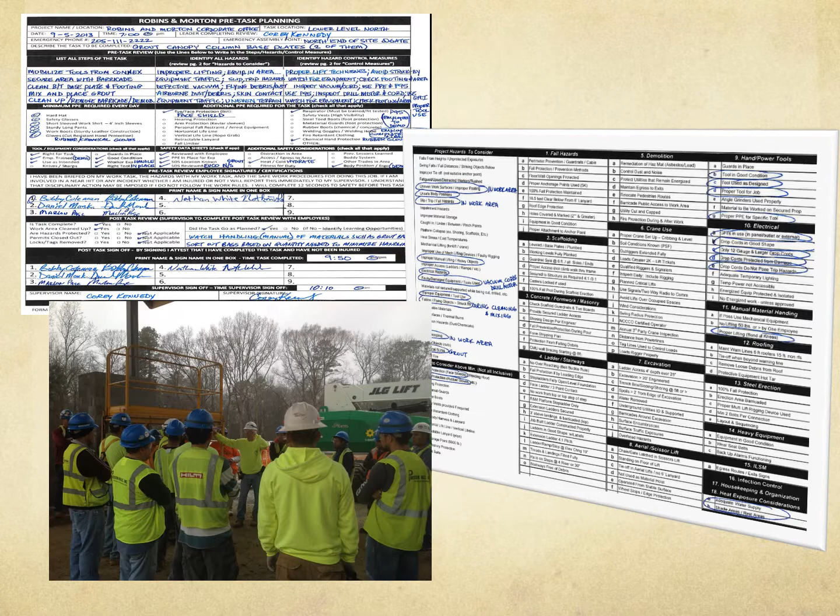Safety meetings. A site-wide safety meeting will be conducted by the project team each week to discuss relevant safety topics. Each subcontractor will also hold a weekly safety meeting with their teams.

Lightning. We work in rain, but we never have to work in lightning. Count the seconds between seeing lightning and hearing thunder. If this time is less than 30 seconds, lightning is still a potential threat. Seek shelter immediately.

Now, that's a lot of information. Let's put it into practice. Come to the project and see what we're talking about for yourself. We hope through this presentation you were able to catch even some of the excitement we feel for this project. Now come on, let's do this.

You'll have to do your part though. Let us know what works, and as important, what doesn't. It's your project. Make it work for you and for our clients.